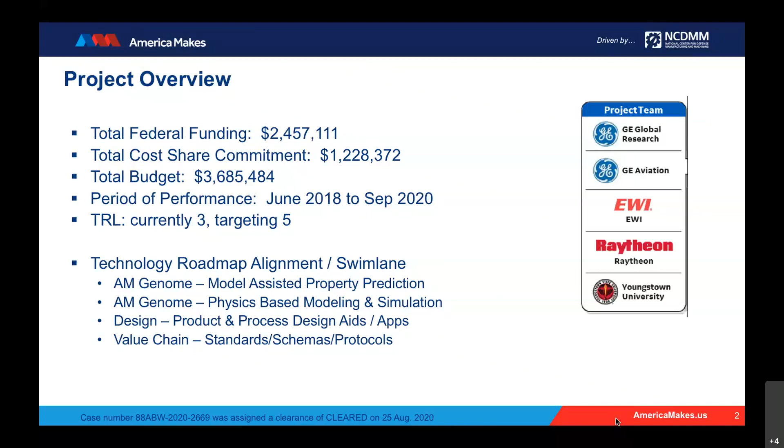The problem statement here was that most everybody is aware of how long and tedious the path for certification is to go from a concept part to a production part using additive manufacturing.

Typically, after you design the component, you choose a set of process conditions, you build it, you cut it up, you test it, and you reiterate a number of times. That's really what takes so long.

The objective here was to see if we could develop a model-based predictive model that would predict, based on linking process parameters, additive characteristics of the feature we build, and material property relationships, so we could reduce the amount of time it takes to go from concept part to actually qualifying the part in production.

In today's presentation, we'll talk about the overall problem statement like I just told you, and the overall technical approach. I'll provide an example with a concept part showing how we identified the features of interest, describe the design of experiments and the build of those features, how we extracted test samples from them, give an overview of how we organized and conducted preliminary reviews of the test sample data and material characterization, and then provide an overview of the predictive model and how we built and used it.

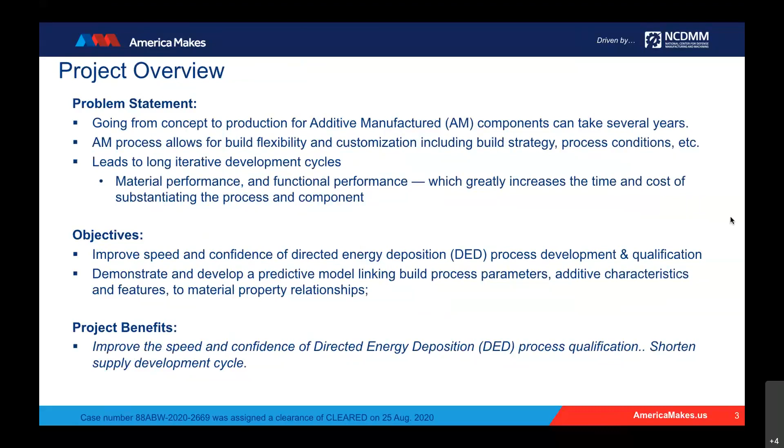So Shlomo, if you want to go to page 4. This is a pictorial example of the project, where we started off with a part design, a representative part from the aviation and aerospace business, and then we built that. We identified and extracted the features of interest that were critical to that part, as you can see in the second picture in the middle, where you had feature extraction.

Then we designed a build process DOE around those features. We built them on the additive machine, sampled and cut sample coupons out of those builds, tested and characterized them, and provided those to the data matrix, building a predictive Bayesian hybrid modeling GUI interface for that.

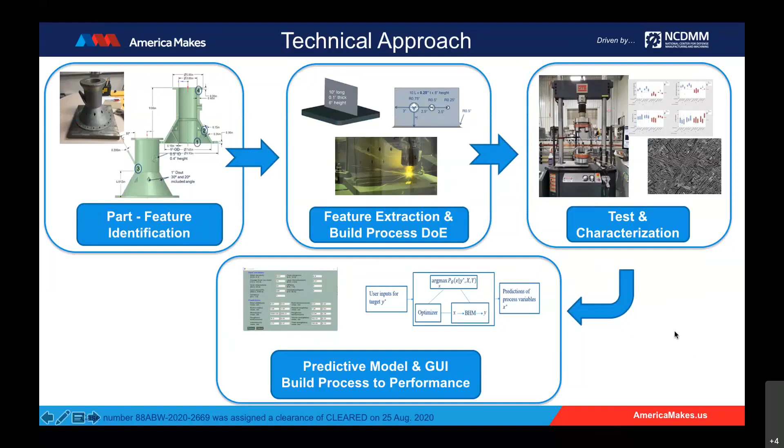With that, I'll hand this off to -- I'm sorry, next slide. So what I failed to tell you in the beginning was that the DED process of interest is a laser blown powder process, primarily made by RPMI -- it was the 557 -- and we built this at the facility we used, which was at EWI in Buffalo, New York. Here are the process parameters, or process capabilities, for that equipment set we were using.

The powder we were using in this particular program was Ti-6Al-4V, and it was a powder set about 45 to 150 microns in diameter.

Shlomo, do you want to pick it up from here and tell them a little bit about the concept part and the building process that we did? Yeah, sure. Thanks, Neil.

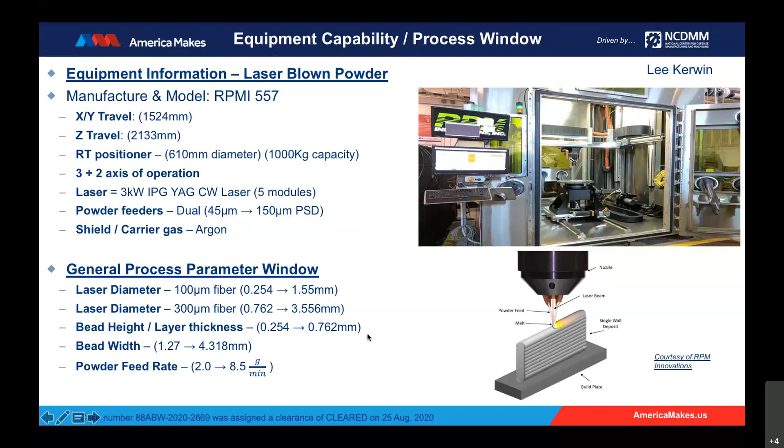Good afternoon, everybody. So based on what Neil talked about, the technical framework was to have an initial goal to build the HPC part itself based on some legacy build parameters. The different sections of the part, as you can see, are built via different deposition strategies. We were fairly successful in our starting build, where some parts built very nicely, while others were not so successful.

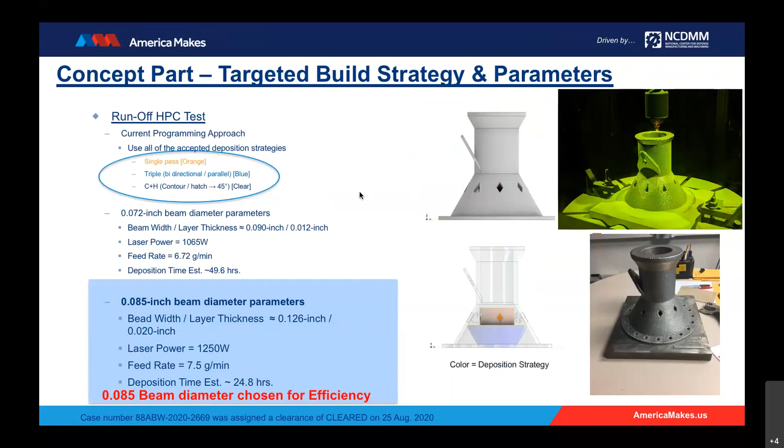But our overarching objective was to identify different features critical to the performance of the part, which is the HPC here. The chart you can see here shows the different features of interest that we can talk about.

The first feature, the most simplistic of them, is the thin vertical wall feature highlighted in blue. Features 2 and 3 are really variants of feature 1, where we have discontinuities or intersections of thin wall structures. So feature 2, highlighted in red, is a hole that we cannot build with vertical build orientation, so you have to change the build itself.

But for other builds like rhombuses and teardrops, the ones you see at the bottom, you can actually build with a single build orientation. So we chose those as the holes of choice in terms of geometry. For feature 3, we looked at the intersection of different wall thicknesses interacting with each other, trying to understand the thermals, which would result in different property structures.

We kept one of the walls vertical and the other wall built at an incline with respect to the initial wall of interest.

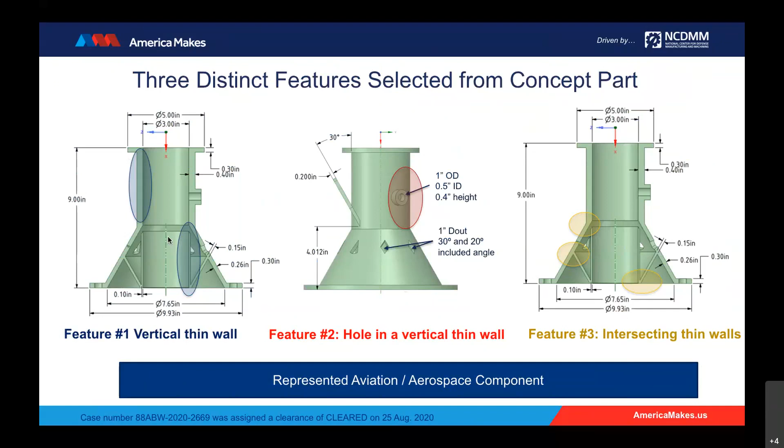So for each of the 3 selected features, we went through a progression of the build schemes, the stress predictions, the sample extraction strategies, and finally the build execution part of it. You can see there are line items for each of the 3 features from left to right as we go from one set to another.

So we're going to talk about all 3 of these features, more so about the wall feature, which is the simplistic one, and which is the basis for the next 2 features that we're going to drive along.

From the basic part of the feature, we start with the thin vertical walls, starting with the dimension of the wall of choice. We looked at a wall of 6-inch tall, 10-inch long dimensions, with the wall thickness governed by the beam width with the overlapping beads for the single or the triple build strategies.

For the contour plus hatch type of build strategies, we ended up having similar wall thicknesses in terms of our targets. So the first thing that we did was to understand the stress states that the wall would see if we make a wall of this size.

We understood that there could be effects of warpage, there could be an effect of high stress locations leading to cracks, so we did some simulations on them. Then we went forward in terms of extraction strategies, exactly where in the wall we are plucking the samples out of, what is the orientation with respect to your build axis, etc.

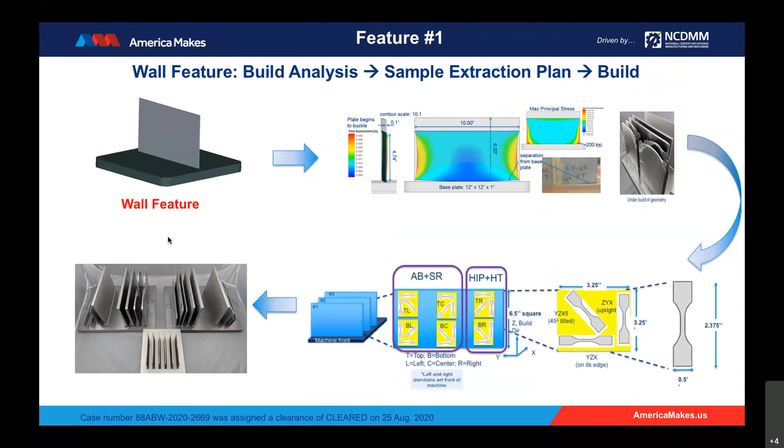And then once we had a clear identification of these schemes, we finally went through the build execution, what you can see in the bottom left, different walls with different thicknesses being built in this DOE. So we go to the next slide.

Once we build the walls, we actually wanted to have an evaluation plan. So we have a layered matrix here connecting the X's and the Y's, things like build parameters, post-processing, and the extraction strategies connected to the evaluation of the build DOEs.

So things like the build characteristics such as wall thicknesses, build times, material usage, etc., can be directly connected to the build parameters like power, speed, feeds, beam diameters, etc.

And if you go one level deeper, quantifications of the defects in the microstructures like lack of fusions or gas porosities or the lath sizes or the grain size, etc., can all be connected back to the build parameters, but also with the post-processing steps - what kind of heat treatment the part sees, what location the part is taken out of.

And then the last layer down is the mechanical property understanding, which actually takes care of all the above items in the X's, but also looks into the sample extraction, what is the orientation of the sample with respect to the build direction, and also if the surface had a machined surface or not.

So all of this together, we had about 15 different build parameters coupled with different build strategies, 100 plus panels characterized, 250 plus tensile tests. And we were able to obtain a unified model connecting the processing structure property assessment via a data-driven approach.

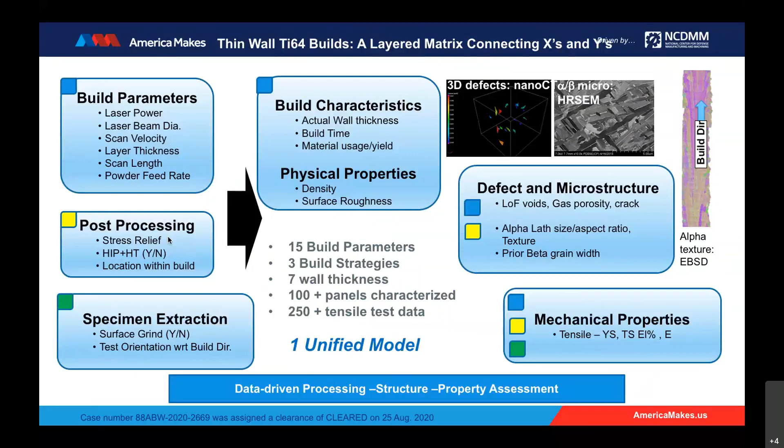So let's talk about the DOE for feature 1 here. You can see that what we executed in this particular feature, we had a wide range of parameters intentionally developed, ranging from a power setting of about 400 watt to 2 kilowatts, tool paths being single to triple to contour plus hatch.

We kept some of the parameters constant to have a manageable DOE. Things like nozzle geometries and focal distances were kept constant, whereas obviously speeds and feeds are going to change based on the beam diameters and the power that you use.

So the columns on the right of that table here, you can see that roughly two-thirds of the samples were left in the as-built plus stress relief conditions, while the remaining one-third was in the fully heat-treated conditions. The heat treatment schedules are in the bottom.

One thing I want to share here is for the stress relieving heat treatment, we kept the heat treatment to be done at a much lower temperature than what usually Ti-6 sees. This was intentional because we wanted to achieve 50% stress relieving so that we can keep the build memory in terms of the microstructure intact without fully cracking the part.

When we liberate the part from the substrate, it shouldn't crack, so the stress relieving should be enough to not crack the part when you relieve it from the substrate. But at the same time, it should not forget the microstructure that was generated during solidification and post-solidification solid state transformation processes. Then the HIP and heat treatment was done by a standard Ti-6 heat treatment as per the titanium handbook requirements.

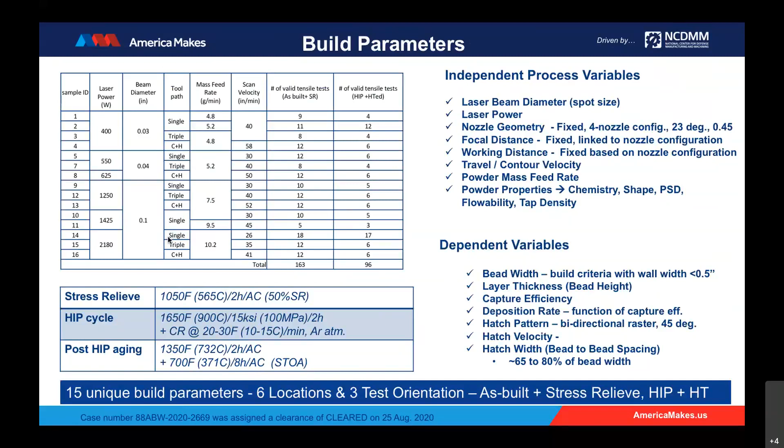Changing gears a little here, the next few charts we're going to quickly talk about the different characterization tools employed for evaluation of individual microstructure and defect characterizations. As you can see in the chart, it compiles what we are measuring with the measurement units. The focus was to generate quantitative values of representative microstructures that could be directly fed to the model with no qualitative bias—no good, bad, ugly kind of bias in there.

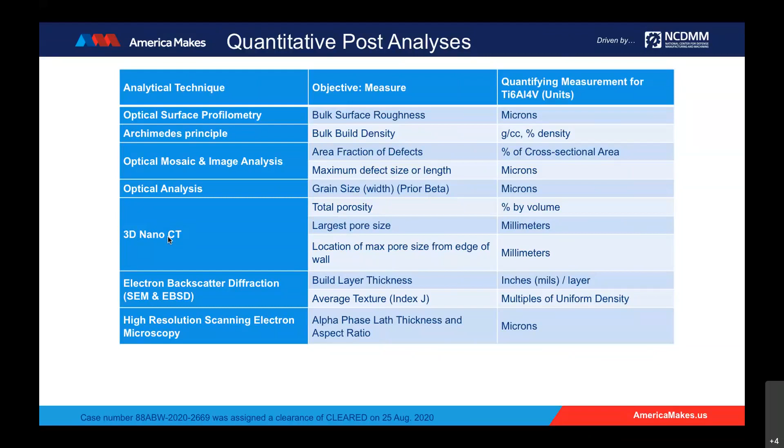So all numbers, right? We did tons of data generation, but I'm going to highlight a couple of important findings from this work, which I can share in the next couple of slides here.

What you can see in this chart is a nano-CT evaluation from left to right. You start with 3D scanning with void identification, visualization, and quantification. We kept the coupon thickness constant to make sure we are looking at the same interaction volume. The resolution is about 6 microns per pixel, and it takes about an hour to image these, so they were really quick turnaround.

It was very clear that the contour plus hatch build strategy showed the highest amount of porosities. This was a clear indication and a powerful technique of nano-CT, where we could not only ID the type of defects, we could visualize them, get the number density as a function of distance from the surfaces, and also correlate that with the build strategy—a great insight. Realistically, for thin wall builds, you can do this in a non-destructive fashion also.

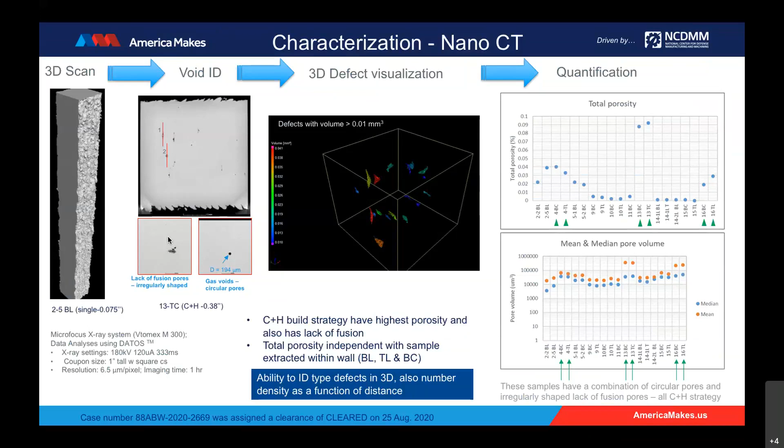The second part I want to point out is the quantification and determination of the orientation of the lath structure. As you can see on your left, there's a comparison of statistical distribution of the HCP alpha lath size, as well as the lath distribution for different heat treatments.

On the top left you have the as-built plus stress relief sample, and on the bottom left you have the fully heat treated sample. You can see that the average lath size has changed, but also the distribution of the lath has changed during the heat treatment, which is a great deal of information we didn't have before.

Similarly, on the right, the colorful maps you observe are due to the crystallographic orientation of the alpha phases. This clearly exhibits a 45-degree texture of large-scale alpha laths with respect to the build direction. This was a significant finding because it will be impactful in some of the property data that Shrikar is going to share later on.

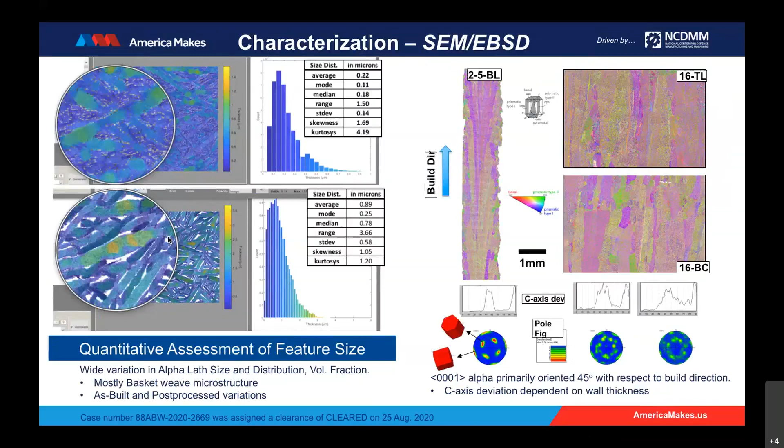One last aspect of the microstructure before we talk about the property data and modeling outcomes. Usually there is a multi-level connection and contribution of the microstructural factors that yields the observed property response—no pun intended. So there are different hierarchies of the microstructure, which I've highlighted here, which actually correlate with the yield strength.

Things like alloy chemistry, where you have the starting powder composition, the post-build chemistry, and the post-heat treatment chemistry—how the major and minor elements change with post-processing is something we have to keep track of.

Grain sizes and grain anisotropy—here the Hall-Petch effect comes into play. The image you can see here shows very anisotropic grains grown more elongated or columnar along the build direction, so that would change to have varied properties along the vertical and horizontal directions.

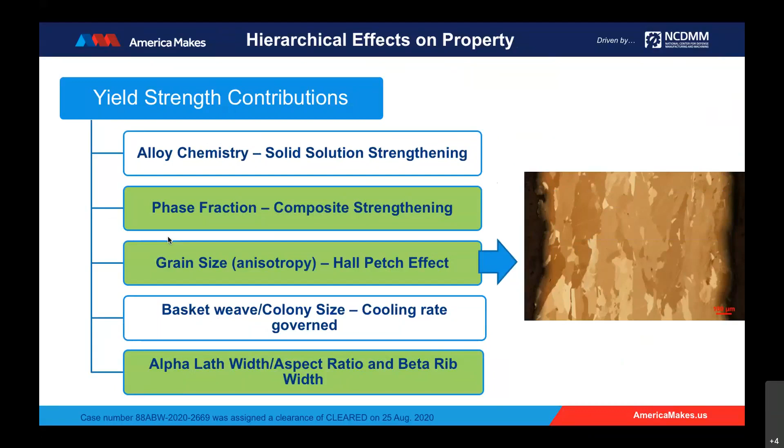And then taking one level deeper, we talk about this basket weave versus a colony microstructure in Ti alloys, which is really a dependency of the cooling rate.

Even when you have a basket weave microstructure, like you see on the right side, you have a very fine scale feature size, which is more martensitic in structure, versus a relatively near-to-equilibrium microstructure, which is more alpha-beta structure. Similarly, having a basket weave structure, the yield strength contributions would be very different between one versus the other.

Last but not least is where we could get into the alpha lath width and aspect ratio part of it, to be able to threshold these numbers and then use it through the deep learning tool we have generated. That was really an important piece of information in terms of quantitative values that was added into the Bayesian hybrid model.

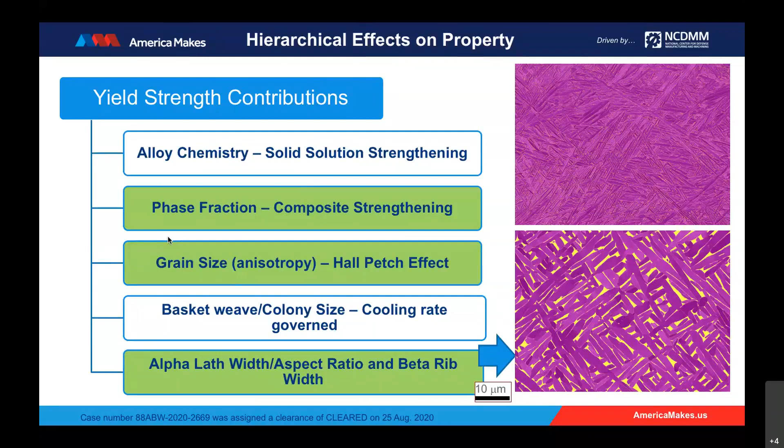After the characterization, both mechanical testing and otherwise, we pulled the data together and performed a first order analysis to make sure if there were any possible trends, and if there are outliers, try to identify them and make sure the data is reasonable.

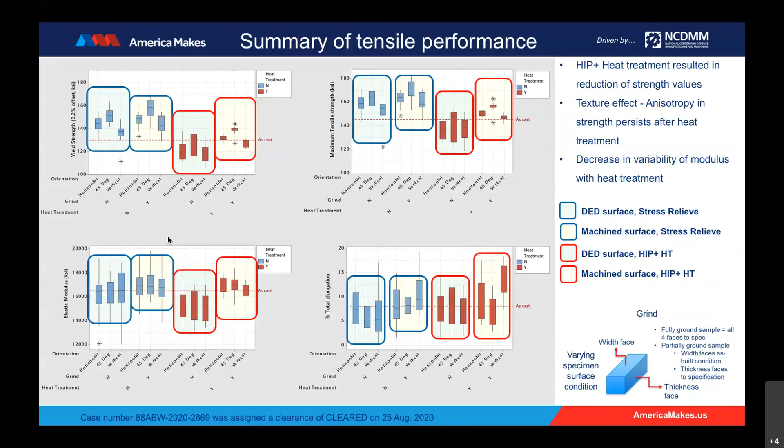So then now if you were to look into the effects of the process parameters itself - show me if you could go to the next slide, please. So here we were looking at linear energy density and the influence of this varying linear energy density upon the different performance metrics.

One thing that was clear was there appears to be a downward trend for both yield and ultimate strength measurements, with increasing linear energy density. However, you can see that there's quite a bit of scatter here, and this scatter is because of the anisotropy within the material.

So if you were to segment this data set by test orientation, you'd see the scatter go down at each linear density. Complementary to this downward trend, we typically expect an increase in elongation. That might be the case, but we have a lot of scatter in the elongation data, and that trend is not really apparent.

This behavior we theorize is, with increasing linear energy density, we see significant influences on the cooling rate, which thereby affects the phase transformation from martensite to close-to-equilibrium alpha-beta phase, which is then in turn reflected in the tensile properties here. So the observations seen here make sense, and they are in line with some of the observations in literature.

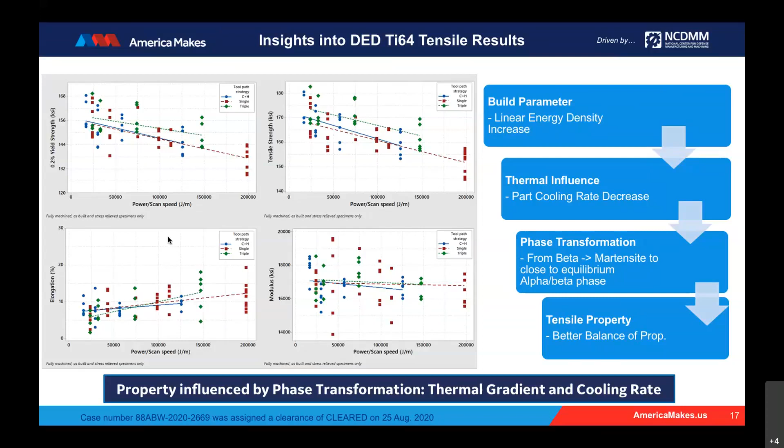So here we move to the next step - next slide, please - which is organizing the data in a fashion where you could read this into the BHM model for setup and training of the BHM model. So at different stages of the process, we've tracked various inputs or input variables, and we've also obtained different outputs and tracked them as well.

So here in this flowchart, you see the different inputs and outputs gathered at different stages of the process, and how the process performance model dataset was put together, and how the process parameter microstructure model dataset was put together. So after this assimilation, we handed off the data to Yiming for BHM setup.

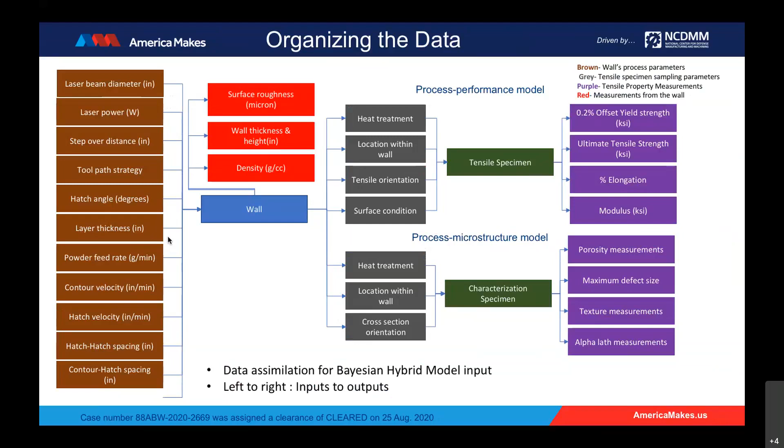So we have made modeling efforts on 4 aspects. The first one is forward modeling to query the predictions at a given input. The input could be process parameter or microstructure, and the model has been evaluated with cross-validation.

The second aspect is the variance-based global sensitivity analysis on the input parameters. Sensitivity analysis quantifies the influence of each input variable on the output parameters.

The third one is on inverse prediction and optimization. Inverse reverses the process to find the inputs with desired output quantities, and prediction could be performed by setting up the target values.

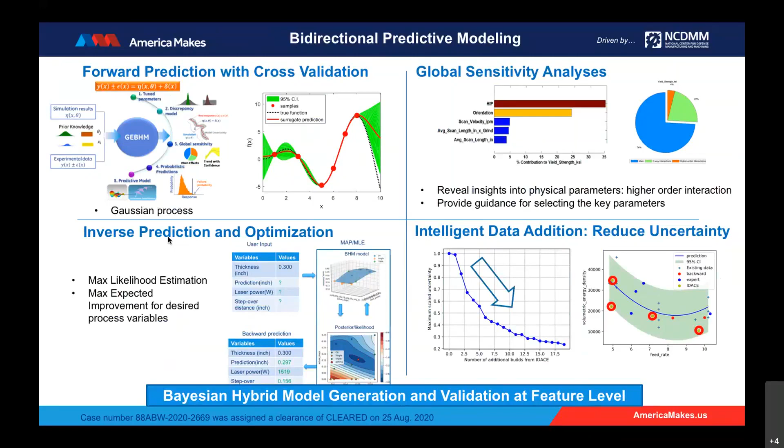The fourth part is intelligent data addition, which iteratively recommends input parameters for additional testing. This iterative process could maximize our information gain within scoped budgets.

The first challenge from the modeling is the design of experiments with a statistical method. We are doing it in a hybrid manner. The additive expert had identified the range for process parameters and recommended half the budget based on their empirical judgment.

Then we use a statistical method to propose the remaining half of the builds to maximize the spatial distribution. This method has been verified to be beneficial to our modeling accuracy. The DOE has been examined with visualization and also from expert judgment.

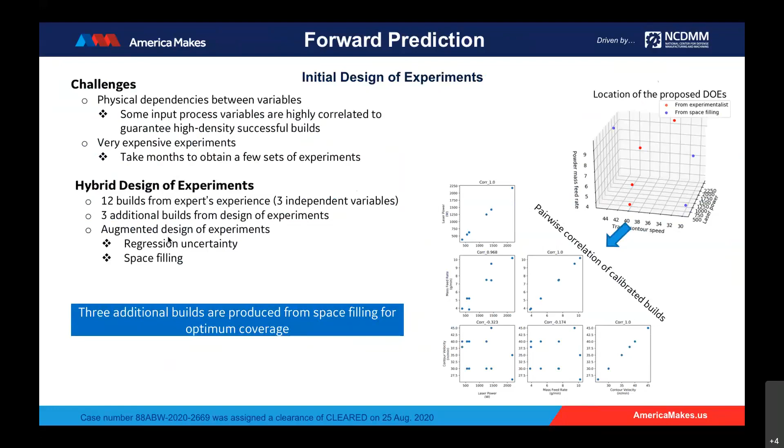This is a brief of the dataset for the thin wall feature. We got 266 sets of specimens, 15 sets of process parameters, and 91 data sets from characterization. There are several interesting things to share with the group.

This is the hierarchical inputs obtained in sequence. Different measurements are collected, including mechanical properties and physical properties, so it's very informative for statistical modeling analysis. The table summarizes the association between inputs and outputs.

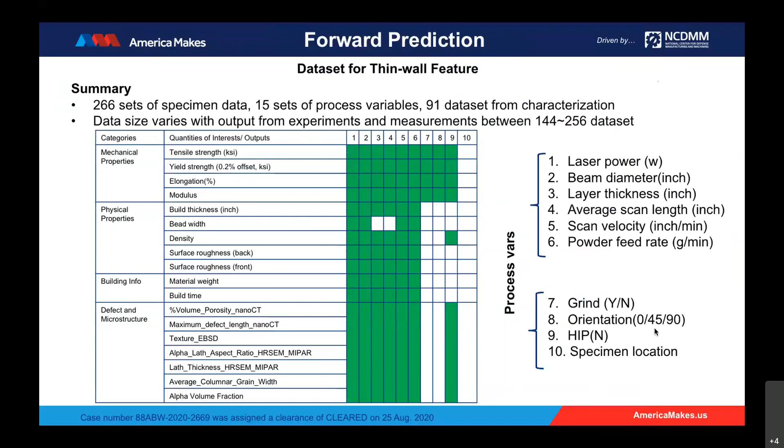We have developed 3 types of predictive models using BHM. The first one is from process to microstructure, the second one is from microstructure to property models, and the third one is from process to property models.

The MP model, short for microstructure to property model, is more general for guided design in general, and the PM model and PP model could have higher accuracy for our identified few features.

We have checked the model with cross validation, as shown below, and also produced the sensitivity analysis and checked their interactive plots to understand the physical insights.

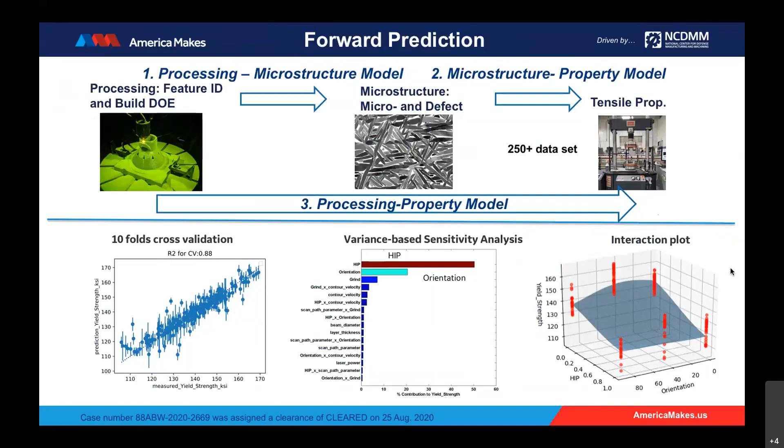This is some details for our evaluation of the developed PP model, which is short for process to properties. For the PP model, we consider about 9 inputs and predict 4 mechanical properties.

The global sensitivity has been produced and checked for each objective respectively. You can see the sensitivity - the top few sensitivities could be used by future designers to simplify their design process and allocate resources on the most important factors.

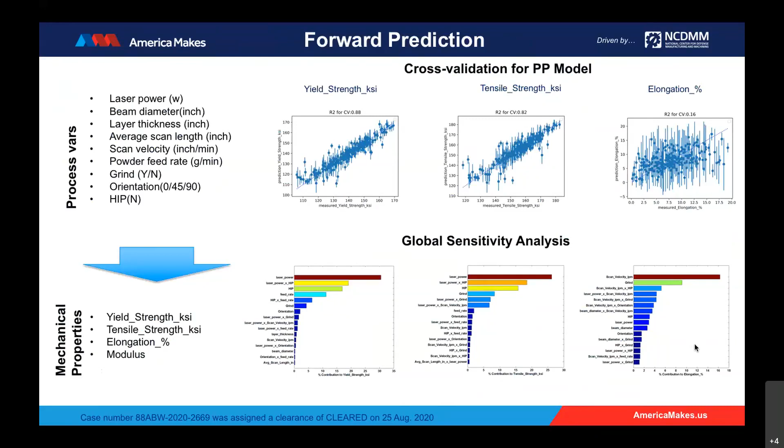And here is a summary of the PM model and MP model details. You can see we have repeated this similar framework to develop properties for microstructure, including volume, porosity, etc., and also from microstructure to property models.

R square has been used as a threshold value to screen the accurate models, and we're using R square at 0.5 as a threshold value to make the model acceptable or not. The identified or acceptable models have been delivered in the final executables for user exploration.

Another thing for the MP model, a bit additional for the audience, is that the MP model has included expert insights on how we extract the input parameters, and there might be information missing from the CT scan to the microstructure quantities, which could be something to explore further for the next step.

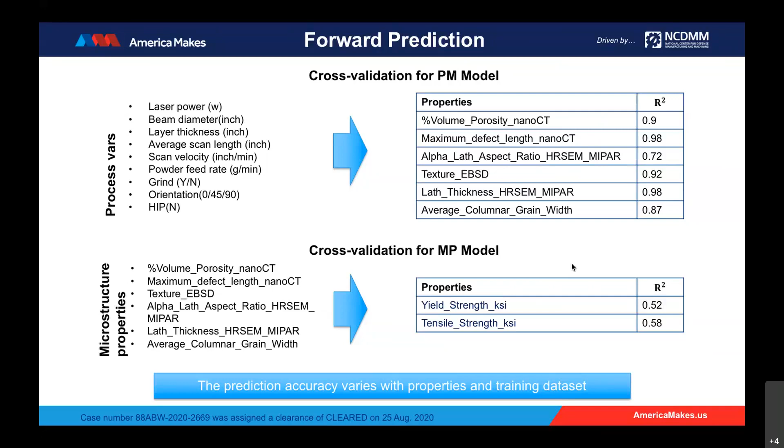After developing the forward models for PM, MP, and PP, we created the feature for inverse prediction and optimization. The key concept is how do we identify the desired process parameters and microstructure parameters with given or identified mechanical properties, either with the target value or with just the identified properties for optimization.

The inverse prediction and optimization is essentially a heuristic optimization process. We iteratively call the forward prediction on the developed forward model with efficient search of optimum parameters. For user usage, the user will input, for example, the target yield strength as shown in the figure, or they just want to optimize the yield strength. Then the optimizer will be initiated based on robust objectives, either maximum likelihood or maximum expected improvement, to search for the optimum design process parameters.

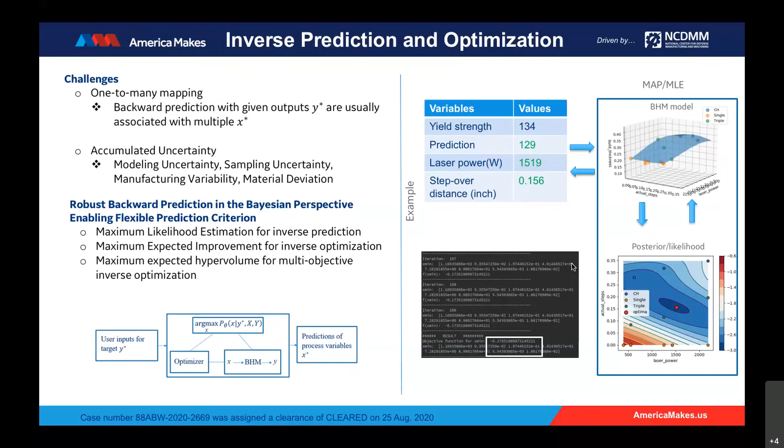This slide gives a little more detail on the algorithm. First, the user inputs the target value or identifies the properties of interest, and the optimizer will be initiated in an iterative manner using a genetic algorithm, as a constrained multi-objective optimization. The constraint comes from the range of the process parameters and is accessible for the future user.

Then the optimizer will iteratively call the forward model and evaluate the objective functions. We have implemented multiple objective functions for different conditions. Once the stopping criteria has been met, the recommendation of the process parameters will be outputted for the user's evaluation.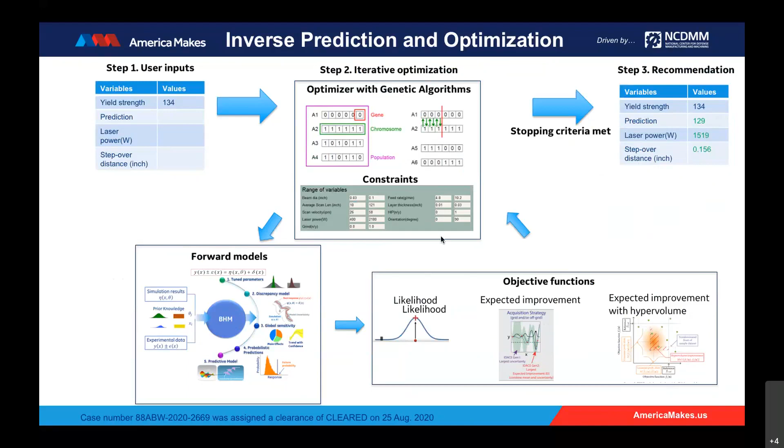After having the bidirectional models, including forward and backward, another piece is intelligent data addition. For this, we have been using a software called IDACE, which is built upon the forward model. This slide summarizes the basic flow chart.

Basically, the user will collect the uninformed DOE, from the design of experiments or historical experience. Then we collect the data, either from build or defect analysis. This initial data will be modeled using our BHM model and associated with the stochastic prediction. IDACE software will rank all the candidate points in the whole design space and recommend the most informative point.

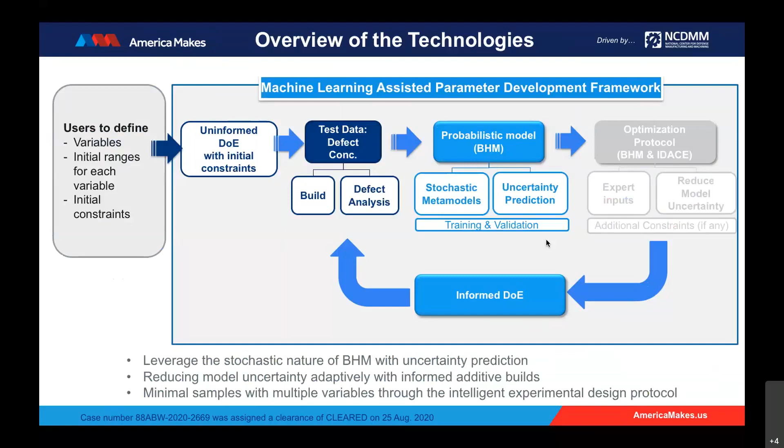For the user to be tested or built. This process is iterative and more informative than the all-at-once design of experiments, and it also leverages the nature of BHM.

In this slide is our evaluation in a hypothesis manner. The left figure is the estimated uncertainty reduction with additional builds. You can see with the first 4 builds, our uncertainty could be reduced almost by half.

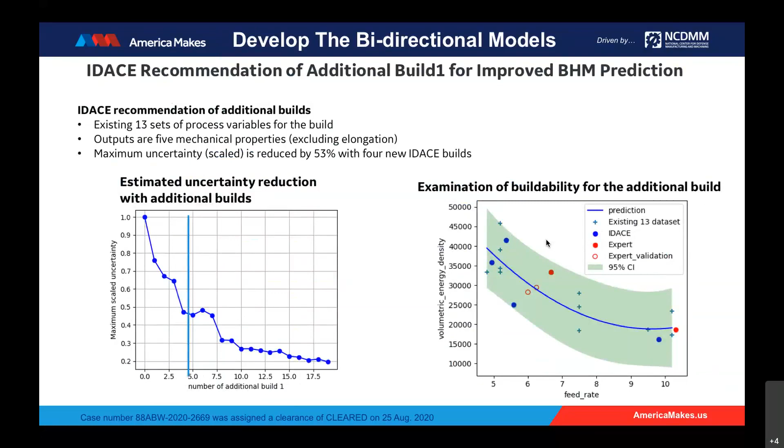So this identified additional builds had been delivered to the additive experts to be built and tested, to augment our model and also do the validation.

This gives the audience a snippet of the additional builds. We have added about 10 builds of data to refine our model and also to validate our model accuracy.

So we have two sets to keep in mind. The first one is for model refinement. The second one is for blind validation of our previous models. This had been visually examined from the pairwise plot and the expert's judgment.

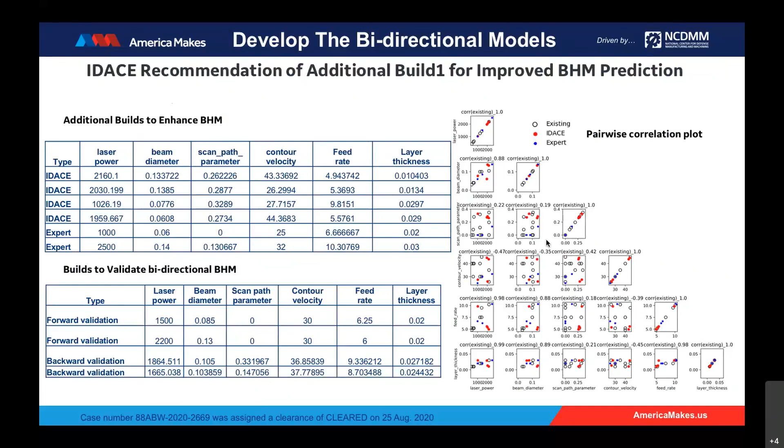On the left figure is a quick validation of the validation data set collected from the additional test. In the figure, the blue dots are our existing or original training data, and the black lines are the validation points with the error bar.

The horizontal axis shows the measurements for the yield strength, and the vertical axis shows the prediction. We have a 45-degree line, which indicates how consistent the prediction and accuracy match each other. You can see in the plot, our predictions are conservative to cover all the true error, which is very important for safe design. Also, accuracy-wise, it aligns with the overall trend of our training.

And on the right figure is a concept called conservative estimates with a lower 10th percentile, which has been enabled together with the mean value as a conservative estimate for the user's reference in their design.

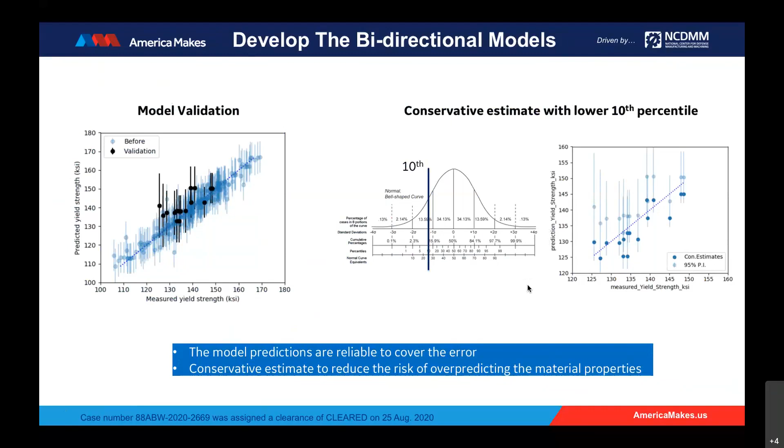The left figure is a quick comparison of our updated model and the original model. We've collected the uncertainty distribution across the whole design space using a 100,000 data set. The blue shows the distribution of the old model, and the red shows the distribution of uncertainties from the updated model.

Usually a smaller uncertainty means we're more confident in our model. After the additional tests, you can see our uncertainty increased systematically across the whole design space, indicating increased conservatism, since our model now has larger uncertainties to account for the additional tests from different machine setups, material lots, and test sites. This additional source of variation has been reflected in our increased uncertainties.

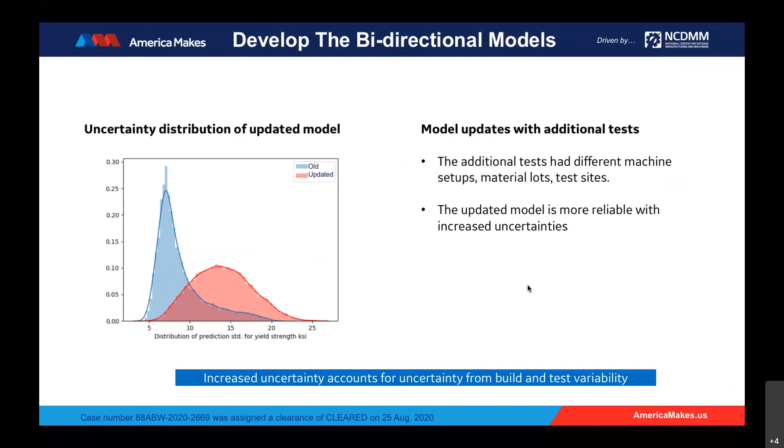So, next slide please.

The final piece of the modeling is a graphical user interface and standalone executable. The developed model and validation have been incorporated into this executable. The user will have interactive access to this bidirectional model, able to identify the model direction and features, along with sensitivity plots.

We're also using this executable to do some validation against additional tests. You can see in the bottom figure one testing point: the experiment gave us a value of 134, and our prediction is 138 — just a 2 or 3% difference.

And we also provided the conservative estimate, which is closer to or slightly lower than the experiment, so the user can have a safe design.

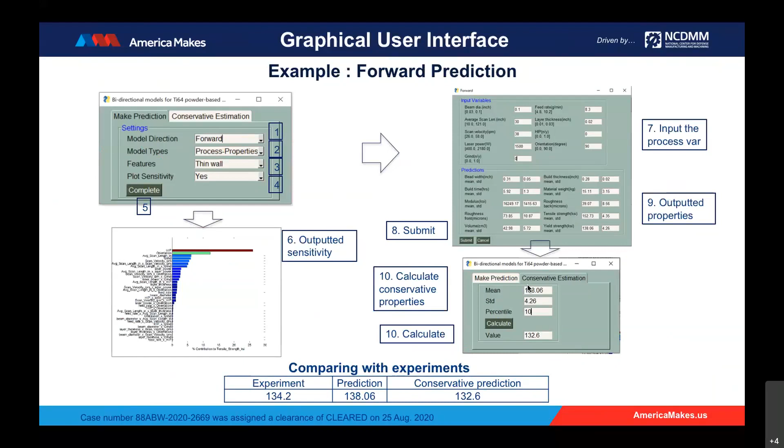Now I will switch to Shomo for the remaining talk. Shrikar, actually — Shrikar, please. Yep.

Thank you. So switching gears a little bit from the BHM model analysis, I'll take you through the model setup and framework for the other two features: walls with discontinuity, and walls with intersections and overhangs. Next slide, please.

Similar to feature one, we followed the process of coming up with a design for the thin wall with discontinuity, which we analyzed using simulation to avoid interactions between neighboring features inside the wall — meaning if there were two holes next to each other, we didn't want the building of one feature to influence the other. After that simulation, we came up with tensile specimen extraction plans, and then proceeded to fabricating these walls.

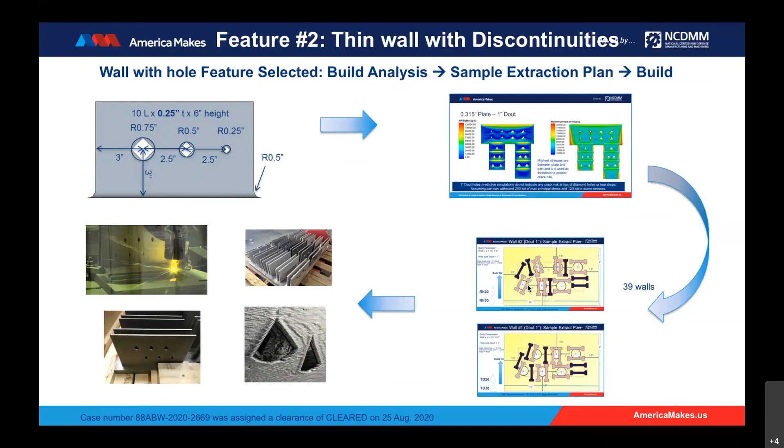Next slide please. To go over the matrix for the thin wall with holes, we had 6 different process parameter sets. Some were subsets from the thin wall build process conditions, and a few were ICME predictions forecasted to improve the process domain studied under this program.

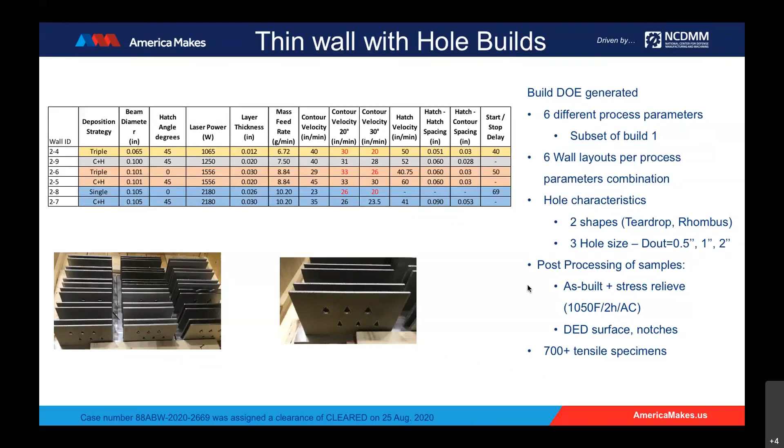We had 6 different wall layouts per process parameter, where we changed the hole shape between a rhombus and a teardrop, and the overall geometry of the hole feature. From this setup, we ended up with about 700-plus tensile specimen measurements, which we used for creating BHM models and framework.

One of the challenges here was how do you convert or quantify this hole geometry in a model. To do that, we further broke down the hole shape into basis features, primarily composed of notches, divots, and microstructure or skin effects. If you take the rhombus hole, you basically have 4 notches.

We sampled tensile coupons with these notches in the gauge volume so we could assess the influence of the presence of the notch on performance. A notch has an included angle, and the surfaces inside it can be a downskin surface — the underside of an overhang — or an upskin surface, the face looking up. So we came up with a nomenclature and variable structure to quantify these hole shapes into basis features. In extension, these 4 holes shown here end up being 12 different features.

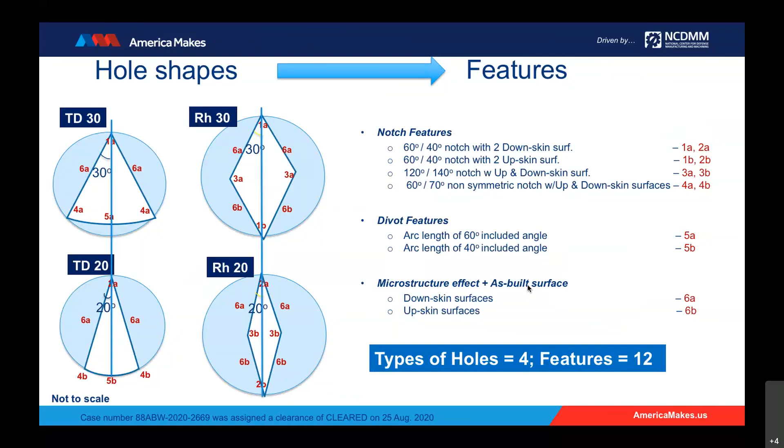So just to quickly go over a first order evaluation of this data: if you pull all of the data and segment it by different notch types and divot types, for the notch data set we had specimens with AM notches. To decouple the effect of the notch geometry and the AM surface finish, we created baseline specimens with the same notch geometry machined into them, letting us isolate the effect of the AM finish. Further baselining, we had a specimen with no notch, to understand the effect of just the machined notch.

We followed the same logic for divot samples, which is a curved cutoff on the coupon. So if you have an AM divot, and a similar geometry machined into the gauge length (a machine divot), and then a specimen with no divot.

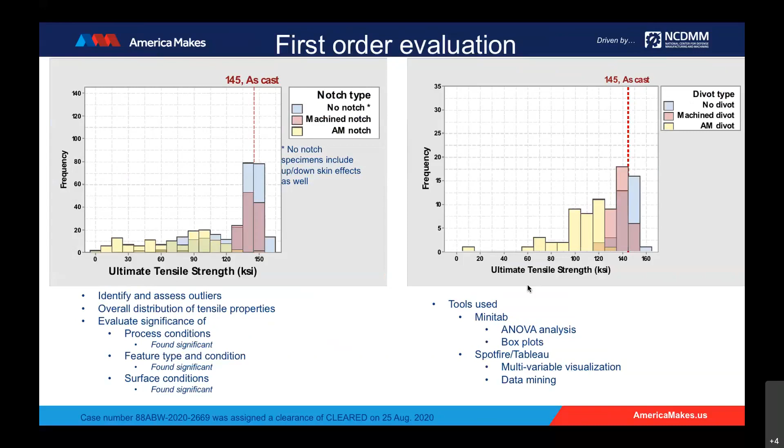Similar to the wall feature, we designed the intersection wall geometry, followed that up with simulation to make sure it fits our conditions, then moved to the specimen extraction plan and proceeded to fabricate it.

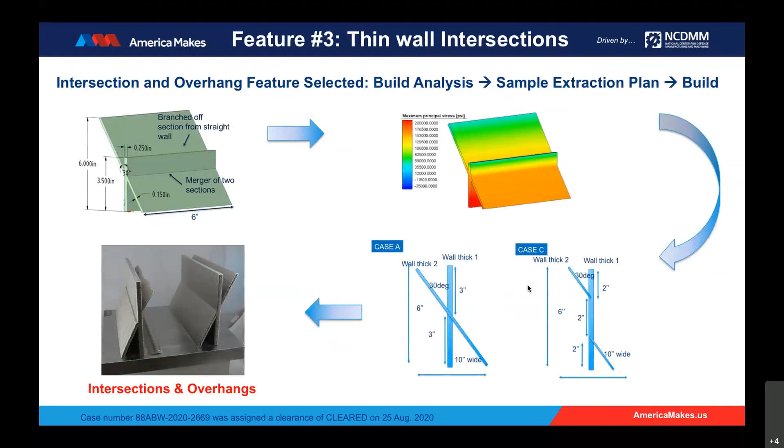In this table you have the different process conditions used to fabricate these walls. We modeled the matrix based on the thickness, or the exact feature, that was in the high pressure case. We matched up the thicknesses in three different locations of the high pressure case and tried to build our experiment around it.

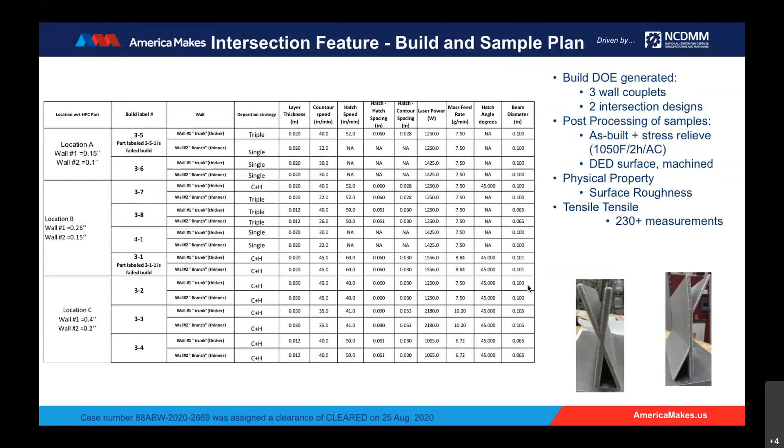We had two kinds of intersections, which you could call a continuous X and a segmented X. Case A and case C are shown here, the two different intersection designs.

For the overhang features, we cut off the side inclined portions and cut specimens out of it. To assess the influence of the intersection, we cut specimens at different orientations within the vertical trunk of the wall. For the intersection region, we had the tensile coupon gauge lengths lined up with the intersection region. In case A, you have the effect of building one intersection in that intersection union region; in case C, you have the effect of building two intersections in that region. Similarly, the building of this overhang also affects the intersection region differently, and that was captured in the model setup as well.

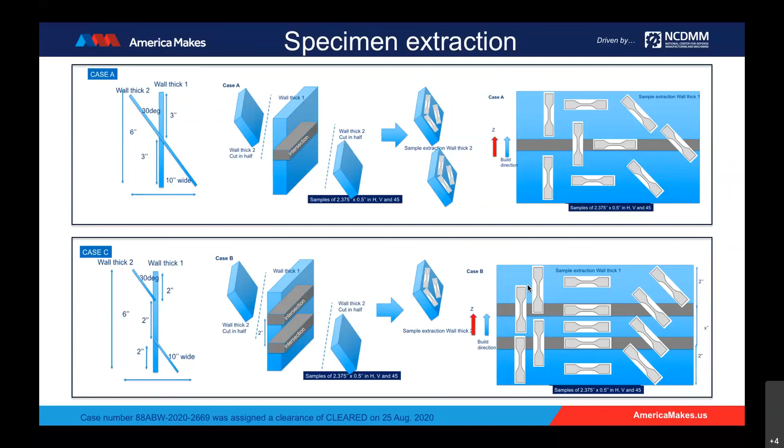Similar to the other two features, we simulated the data by tracking everything right from the design to fabrication to testing stages.

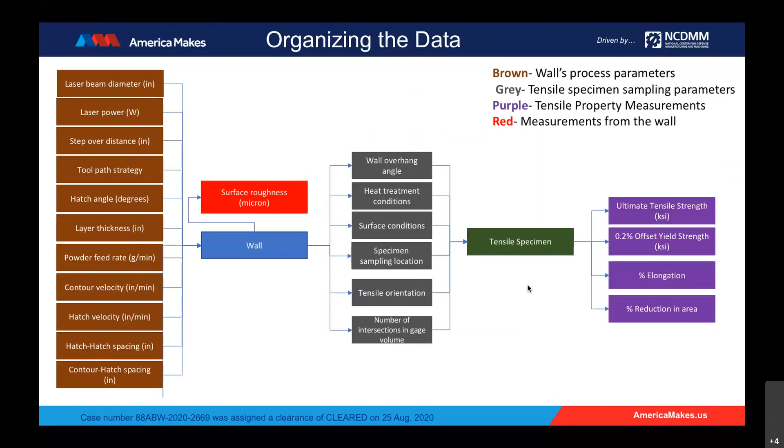One of the takeaways from the intersection build was that the anisotropy seen in build one still persists. Just looking at the data, the presence of the intersections is not clearly seen here, but that is convoluted by a lot of different factors. We didn't find any significant outliers, the data looked good, so we packaged it and handed it over to Yimeng for BHM modeling.

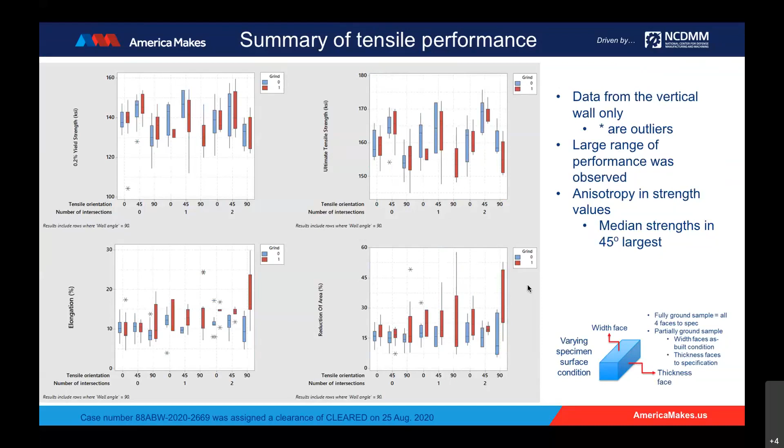So here, I hand over to Shomo for further discussion. Thank you. Thanks, Shrikar.

I'll play this time-lapse video in the bottom left, showing just one example of the builds and how we achieved it.

Using this study as the showcase, we thought of sharing the outcomes at the system level to better explain the feature-based qualification methodology we've developed, connecting features to the build processes with microstructure and defect characterizations and material property relationships. To validate and deploy this for a broader scale, we need to understand the connections from the heat input side in terms of energy densities, build strategies, feed speeds, etc., and also variabilities related to materials, machines, and testing, and connect that to the feature build itself.

So the different aspects of the feature and the identifiers of the feature itself that Shrikar talked about. If you talk about just a thin vertical wall, the dimension of the wall itself. If you look about the inclination, then you talk about the upskin and downskin surfaces, notch sensitivity. And then all of this rounds up with the thermal management of it, right?

So how does the heat get extracted from the builds in post-solidified state? Understanding the spatio-temporal data acquisition in terms of thermal history and the thermal gradient, which is a function of the microstructure and the property that we see.

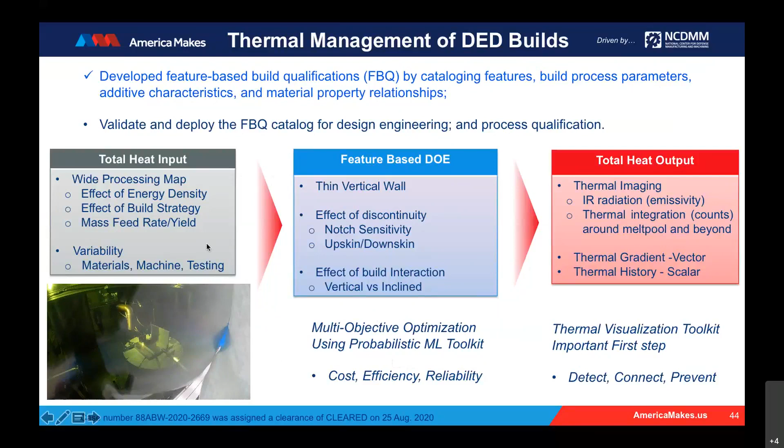So if I go to the next slide here, really from the probabilistic machine learning part, it was a very efficient tool when we compare that with a conventional DOE. As you can see in the chart on the top, we were able to achieve the targeted predictions with 60% less sample space. That includes the fabrication and the calibration costs.

Also, in terms of reliability, when compared with the linear regression, you can see that on your bottom right, that the BHM had as much as 50% better R-square number. So you can eat the cake and have it too, in the sense that you can have a lower cost and high efficient kind of model, along with the greater amount of reliability for the model itself.

So from this slide, which is more looking at the thermography part of it, the Python-based GUI tool was used to analyze the IR thermal data using these laser-based DED approaches. We utilized the IR camera from Micro-Epsilon to capture the thermal history in a front view perspective.

So that gave us a tremendous amount of opportunity to track the length and the depth of the hotspots in the deposition, observe the thermal history below the melt pool, which is also quite important, and then combining this information, we developed tools for analyzing spatial and temporal variations.

So the tool was primarily developed at Youngstown State with assistance from EWI and GE. Shrikar was the main person from GE who helped out with the tool. And the tool helps us identify the max temperature per pixel, time above threshold per pixel, and also average and integrated temperatures per pixel. So all of this is quantitative data.

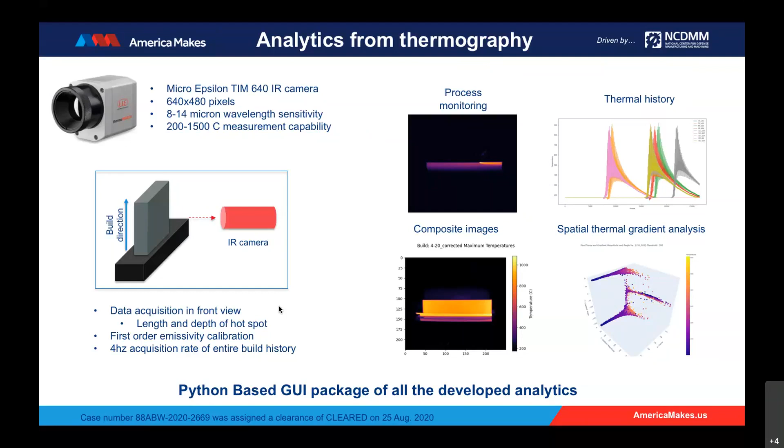So in reality, we could have a potentially better BH model with this as an input for the future drives.

And all of this starts with the wide net that we cast in terms of the legacy builds and also some extended build parameters and build strategies, going through progressively in terms of the quantitative assessment of these and validation processes, including using a physics-based machine learning framework as the umbrella.

So the Bayesian hybrid model plus the intelligent data addition was a great part of it, which was helpful to generate various submodels connecting processing, microstructure, and property in an efficient and effective way.

So hopefully this is a framework that we have adopted, and that could be further taken forward as a universal framework, which would be agnostic of the materials and modality of choice for future efforts. So that's all I have.

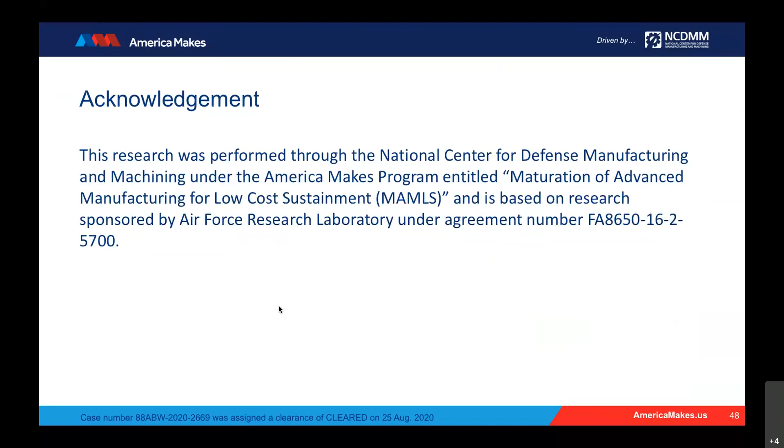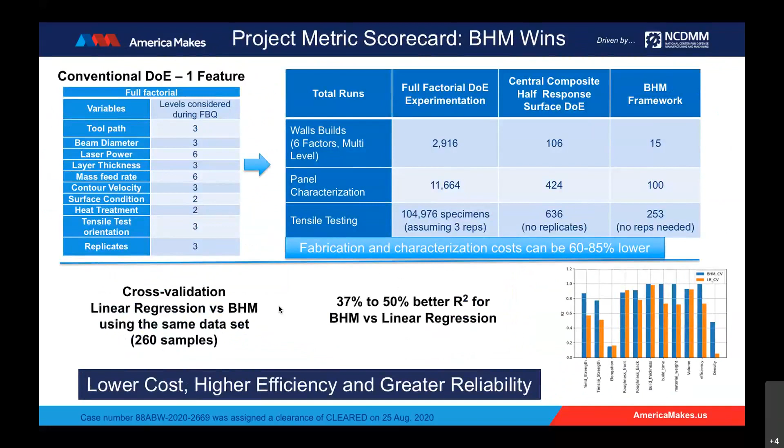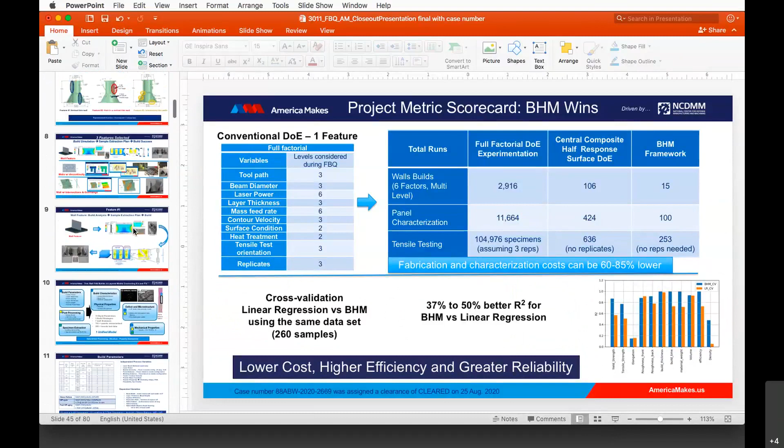In the simulation portion, where Shomo was talking about where we simulated the build of the wall to identify what the stress patterns were and make sure that there was no overlaps, no interactions between the stresses when we put the features in - that was called Simufact. It's basically an off-the-shelf program that we used, and they have an additive model as well.

So is that Python code available to the America Makes members? The delivered executable is not. Didn't include the open source code.

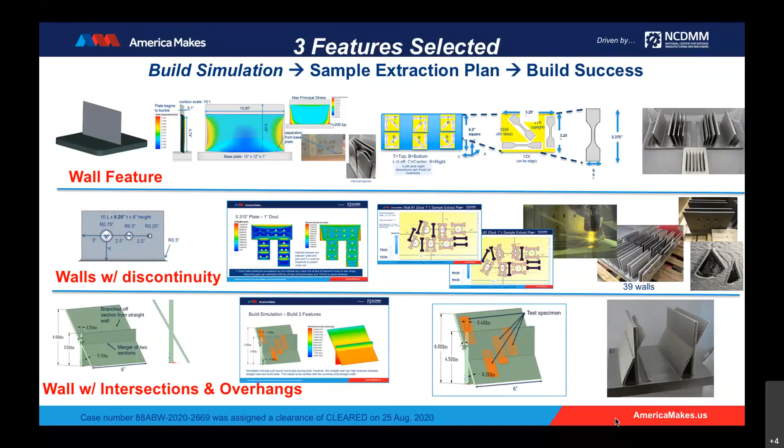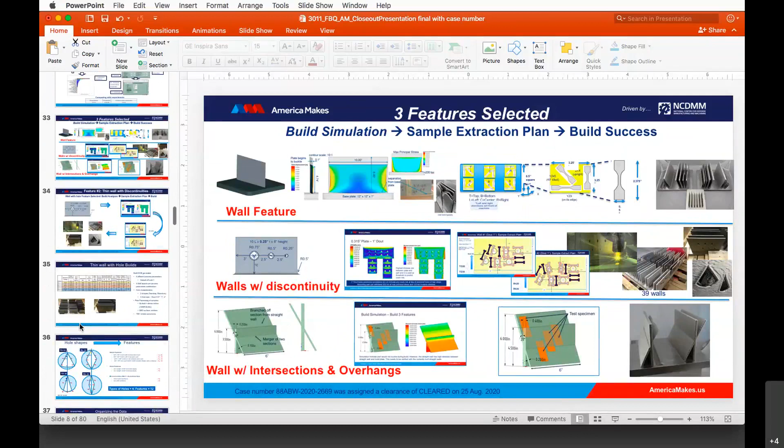Okay, thank you. All right, another question here. Do the data-driven or machine learning-based models have enough physics captured to extend this work to other AM processes, for example, laser powder bed fusion, or do all the experiments and measurements need to be repeated for different additive processes?

Maybe I can share a few sentences first. We have three types of model: PP, PM, MP. And the MP model should be general and based on microstructure characterizations. In this way, ideally it should be working for other types of predictions. But again, the training data set is from the DED, and we might miss specific things like laser energy, etc., which could differ from other processes.

So I would agree in theory, the microstructure to properties should be transferable, but I think there are other physics that could come into play, especially the heat conduction paths and heat resistance, which can come into play between blown powder bed or blown powder and DMLM. So I don't think that's transferable.

Okay, thank you. I think this is our last question here. Given the experiences of the team, do you believe there are opportunities of merit to create unique test specimen designs which may benefit future efforts for assessing AM product performance? And did that play a role in this work?